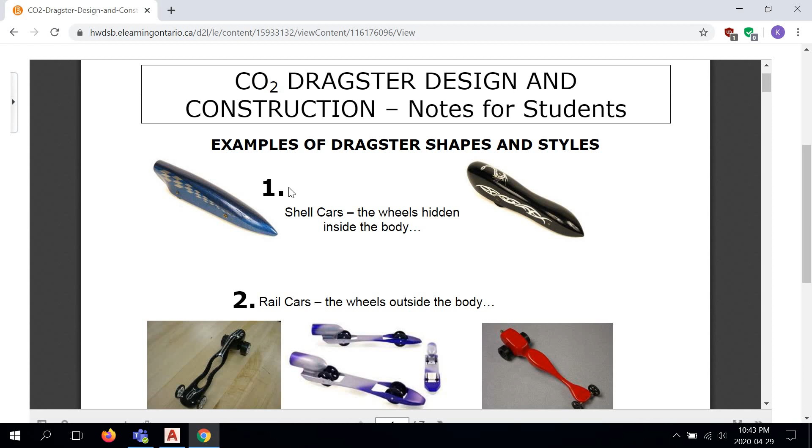Versus rail cars, which you see here, where the wheels are totally on the outside of the car with just an axle hole drilled through the body, which is how my blank looks at this time.

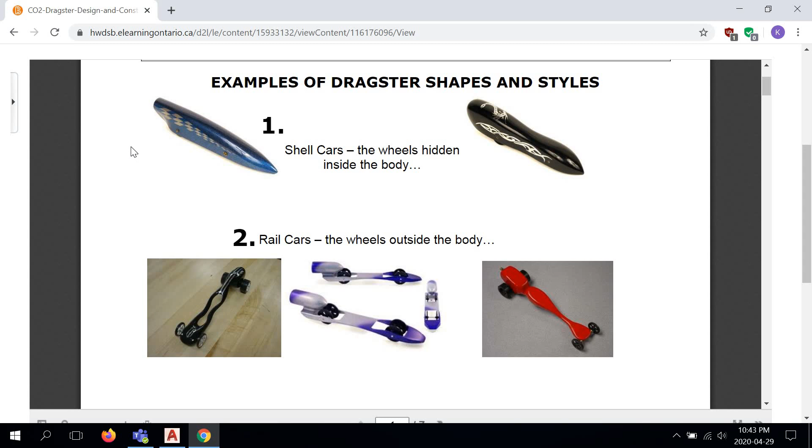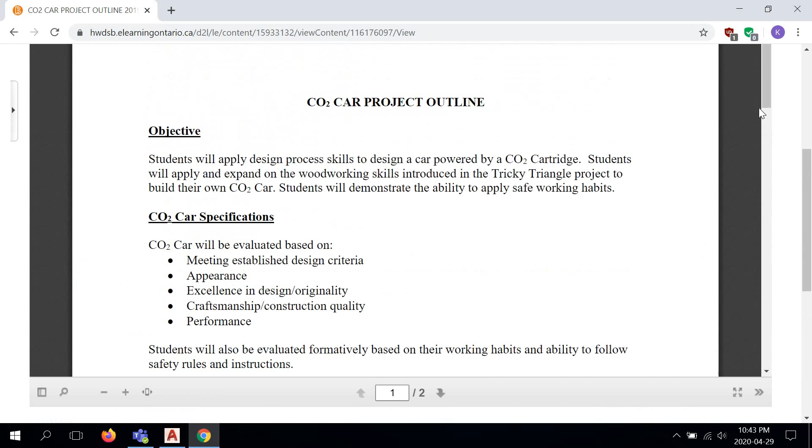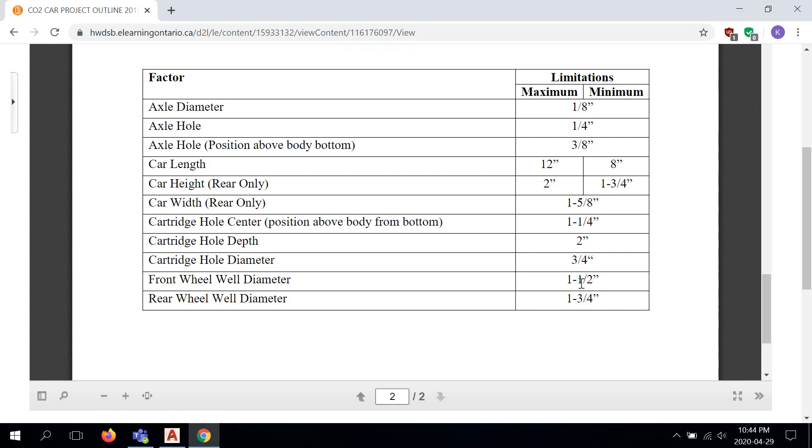Let's take a look at the project outline sheet again. If we're going to be drilling larger holes to shell a car out, we're using 1 3/4 for the rear and 1 1/2 for the front. This is hard to see in this drawing, so we'll check the chart: rear wheel well diameter is 1 3/4 inches, and front wheel well diameter is 1 1/2 inches. These are the two sizes we'll use for our side view in terms of circle diameter.

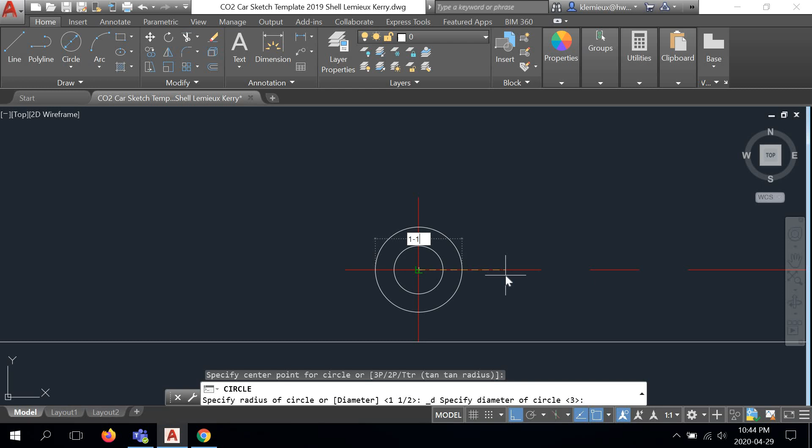So if we go back to our drawing, we're going to use center diameter circle, snap to the center of the axle hole, and draw this circle at 1 3/4. Enter. The front one is 1 1/2 inches, so right click, left click, repeat circle, find the center, and type 1 1/2. Whoa, something went wrong there. Let's try that again. Center diameter. There, okay, now we're cooking with gas.

So these wheel wells need to be moved to the hidden layer. Why do we do that? Because it's a shell car. When we look at the car from the side view, we won't see the wheels inside the car. We're not actually drawing the wheels here, only the hollowed out space where the wheels will sit in the racer. We're not drawing any hardware—no wheels, axle bushings, axles, CO2 cartridges, washers, or screw eyes. We're just drawing what we're shaping out of wood for this project, what you're manufacturing from scratch, not what you're purchasing.

So we're going to trim the bottoms. Select trim, select the bottom of the car as the boundary, right click, then left click, and trim the bottoms of these wheel wells away. They have to be trimmed because, again, they're not actually part of the wheel system—it's just a hollowed out space.

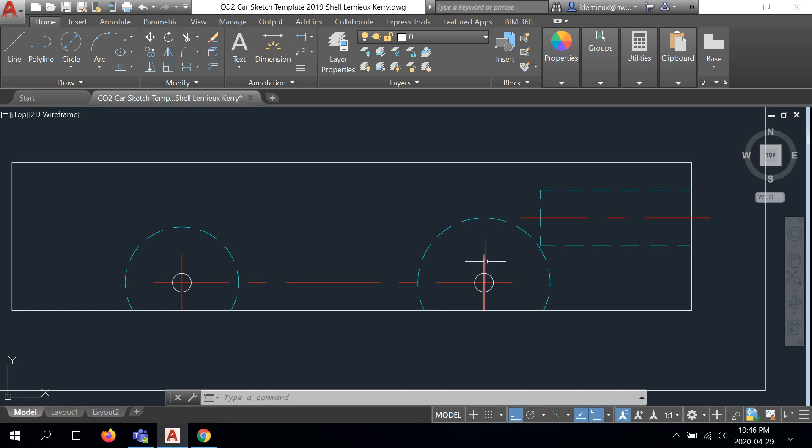Okay, so our center lines now have to be adjusted to suit these new circles. We're going to have to grab your center line and extend them to the quadrant, and then pull out with a grip 1/4 inch per side.

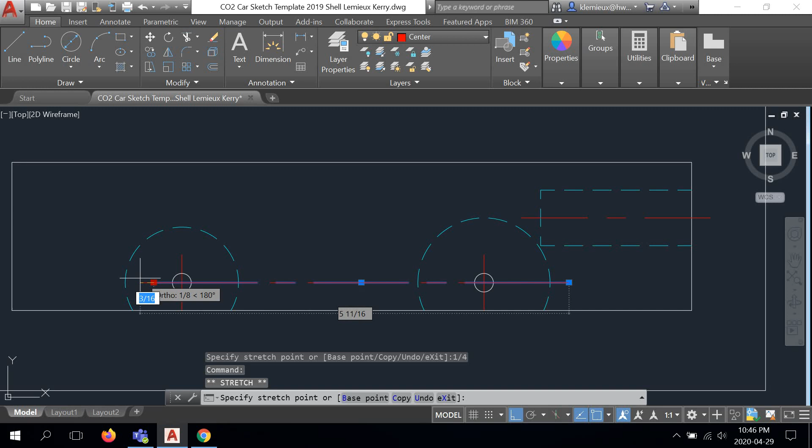Do the same thing for the top here. And the same thing here. Last one. Okay.

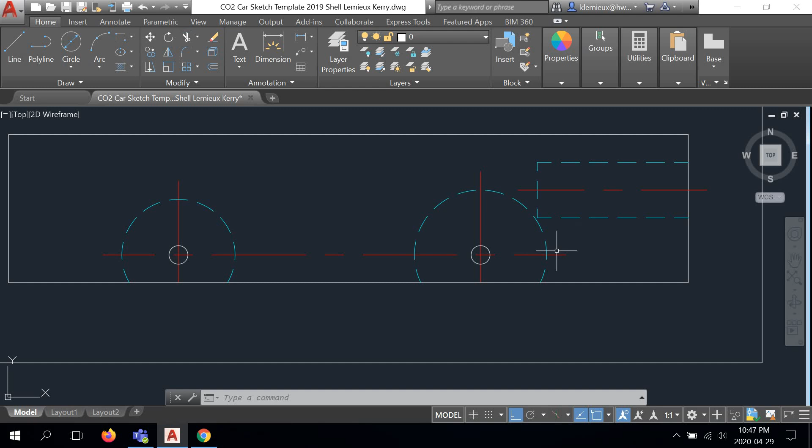Now you need the quadrant snap to do this, so make sure it's turned on. If you're not able to pick it up, you can go into the object snap settings by right clicking here, left clicking snap settings, and making sure that quadrant is checked on. In my case it was checked on, yours probably won't be, so go in and check this on, and then you'll be able to do what I just did. Alright, so we'll hit OK. Alright, so our side view is looking complete now for a shell car.

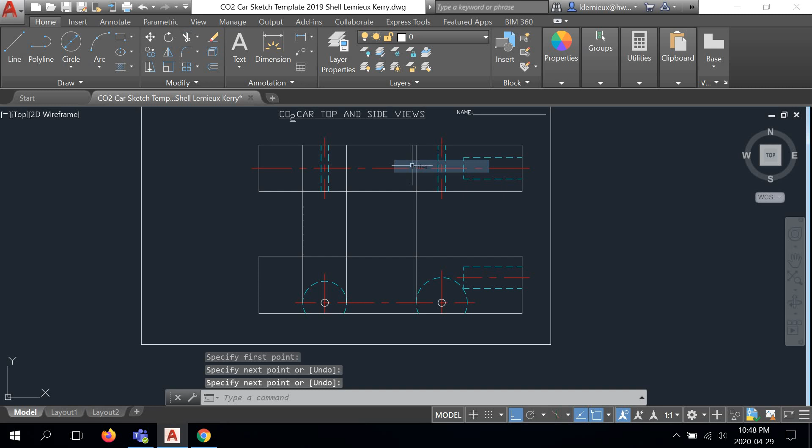So now we're going to take a look at the top view. What we're going to do is grab a line, find that quadrant, and pull a line up to perpendicular, like this. And then right click, left click, repeat line, do the same thing again. Right click, left click, left click, right click, left click, enter, escapes the command, and so on.

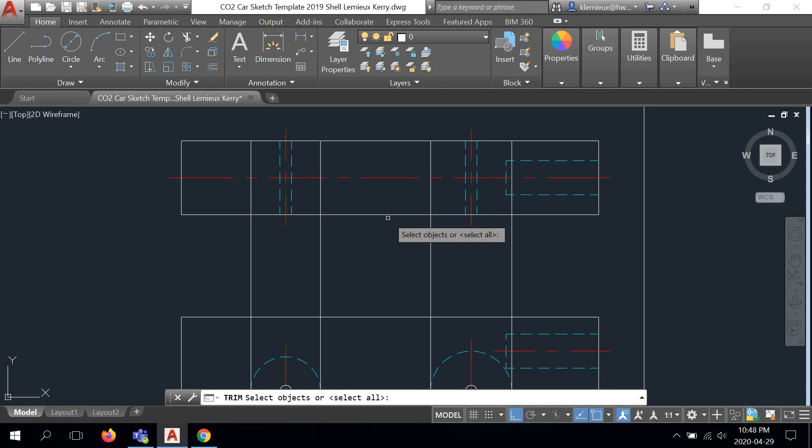Alright, so now we know where the wheel wells begin and end for the front and the rear, so we're going to trim what we don't need. Let's hit the trim command, pick this line as your boundary, and then trim away these lines here. Okay.

Again, because we're looking at this from the top view, we don't notice the wheel wells from the top, so these lines have to be turned to the dark side, hidden lines. Okay.

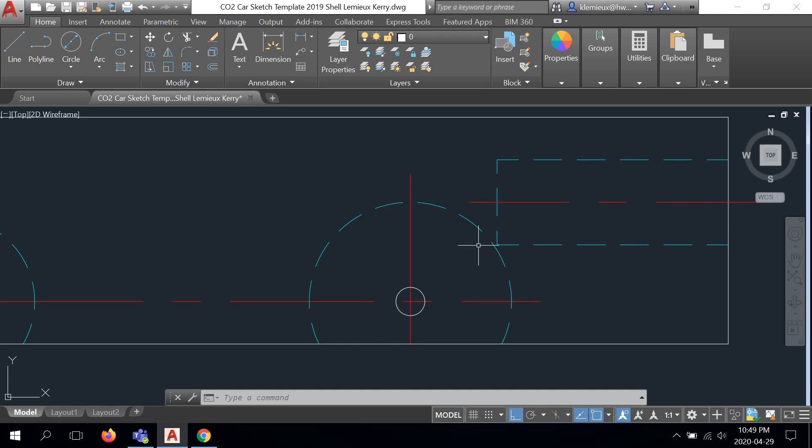Now, some students look at this and they think, oh, that's not very good. Look, my rear shell wheel, this CO2 cartridge hole drills into the end of it, and it's not going to work. So this, I need to change this. I can't do a shell car. Well, yes, you can, because if you look at this from the side view, it's just the way it presents. You can see here that the cartridge hole doesn't meet the rear wheel. There is just enough space here, if everything is laid out and drilled in the correct position, that the rear shell wheel will not meet up with the CO2 cartridge hole.

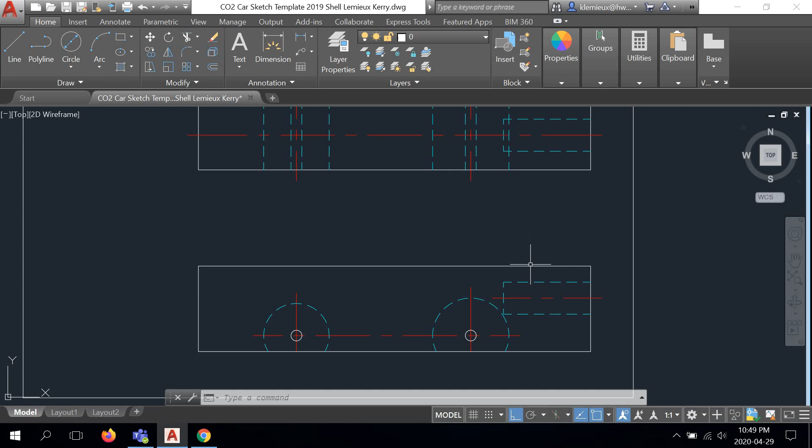So you're good. It just looks that way from the top view because, from here down, from the top view, this cartridge hole is covering that. It kind of looks like it's interfering, but it really doesn't. So, just in case you were wondering, everything's good.

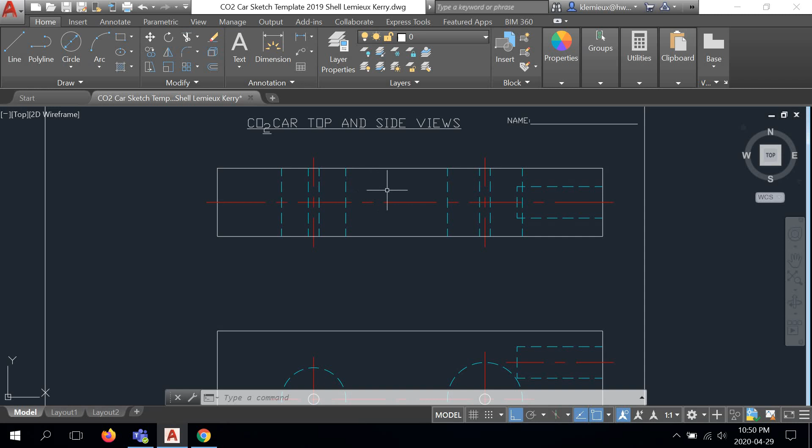Alright, so now we need to decide how far we're going to be drilling in from the inside out. In the manufacturing process, we're going to be cutting the blank in half, and we're going to be drilling each side from the inside out and then gluing it back together.

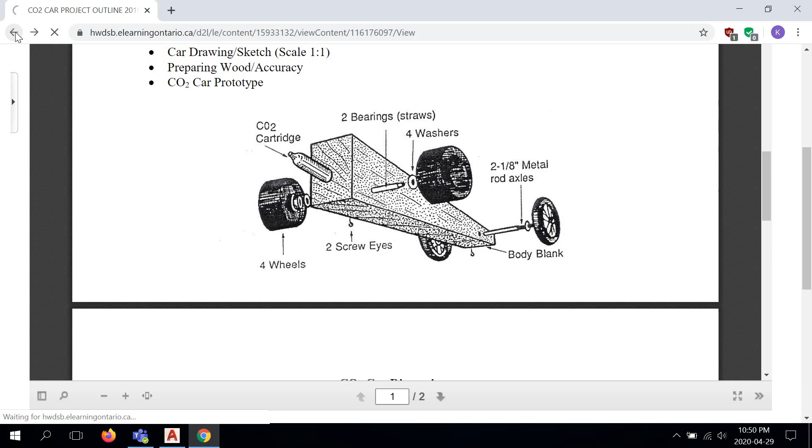So let's take a look at another sheet here. Let's look at CO2 car design process in AutoCAD and pencil drawing consideration. So these are things to consider while you're designing your types of cars. Okay, so CO2 car design process.

Shell wheels, which is what we're talking about right now. It says wall thickness on each edge for the rear wheels only should be no more than 1/8, preferred, or as thin as 1/16. So when you're designing a shell car, your rear wheels should be at the most 1/8, at the very least 1/16, or somewhere in between. So I'm basically giving you the information you need to know to get your shell wheels to work properly on your rear of your car.

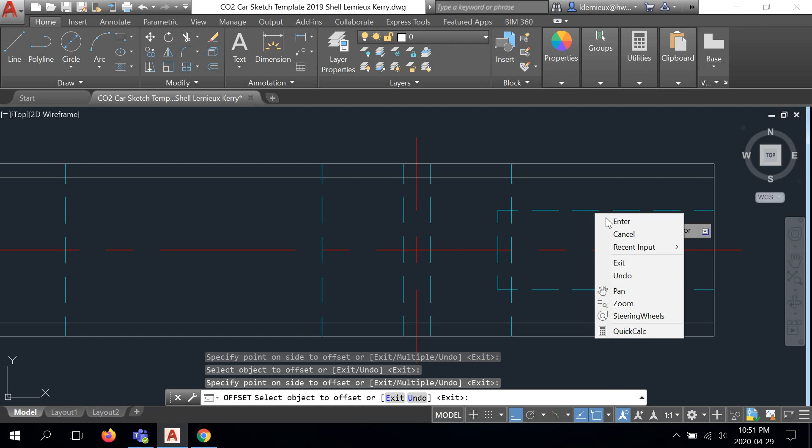So we are going to offset 1/8, enter, and offset from here down and from here up. Okay, so that is what 1/8 looks like. What we do to one side, we have to do to the other because there's a center line representing symmetry.

So let's trim the extra lines. So this one, this one, this one, and this one. And then this line and this line are turned to a hidden line.

Okay. Now, the axle hole passes through the middle, but we're drilling this from the inside out, so we would have drilled our axle hole first before cutting it in half. So that means after we cut it in half, we've drilled these 1 3/4 inch holes in diameter from the inside out each side.

We're plowing away and removing the axle hole in the middle here, so this has to be trimmed out. So we're going to use this line and this line as boundaries, and we're going to trim away the axle hole there.

So the only axle hole that remains is where it's solid, where the wall thickness is here, here, and here. So this line and this line, this one and this one can't exist in a shell wheel style, right? Because this hidden line here makes no sense beyond this line, since it's solid material in these corners. So they have to be trimmed. This and this are your boundaries, and then trim these corners. And now that looks correct.

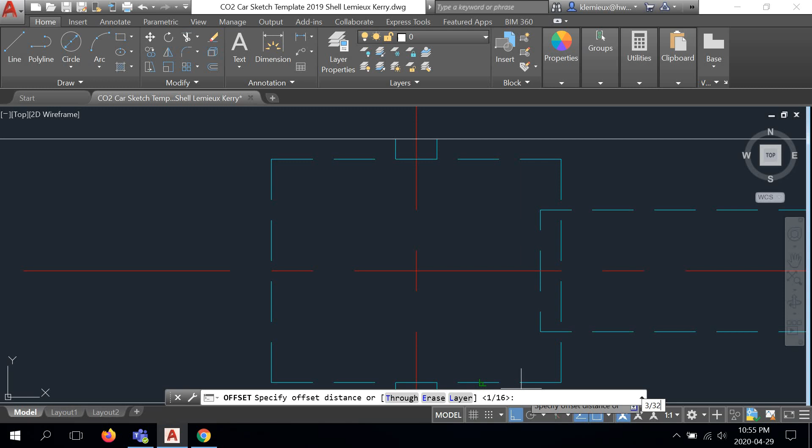So how about this? Why don't we erase that line, and why don't we look at 3/32s, which is between 1/16 and 1/8. There. So let's do this to both sides.

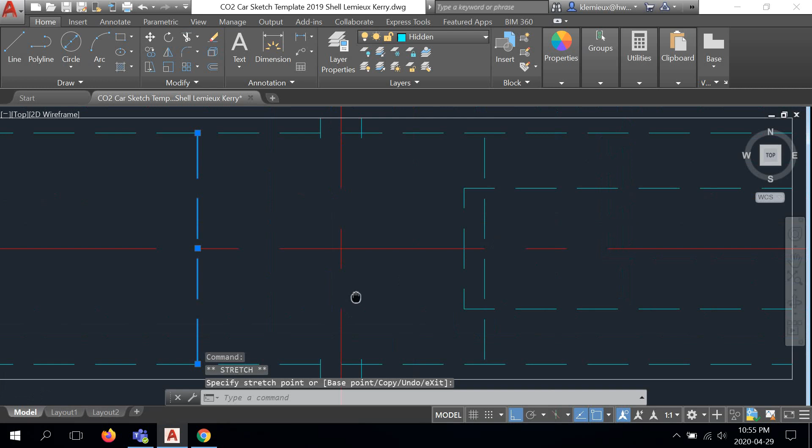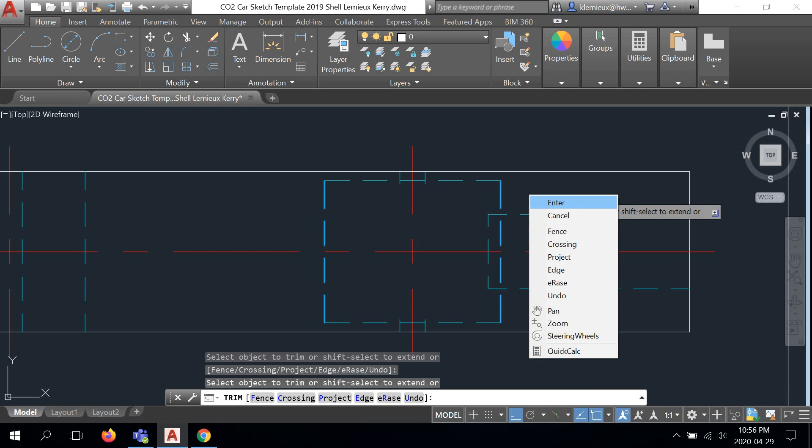Let's make that hidden, and we'll just make a little adjustment here. So we'll bring this... whoops. Okay? And then we're going to trim. And then we have just a little bit more trimming to do. We got to trim the axle hole touch.

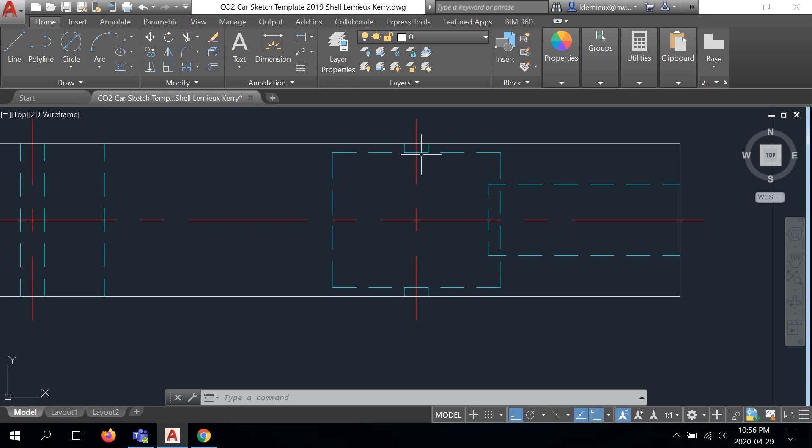Okay, and that gives you a little more room in the wells, and it's still enough to be pretty strong here. It's better than a 16th, but not quite an 8th. So I didn't have to do that again, make it shallower, but I wanted to show you how to edit it if you wanted to change it, right? So it's up to you, but I'm pretty happy with this, and I'm going to leave it the way it is for now. I probably won't be changing it again.

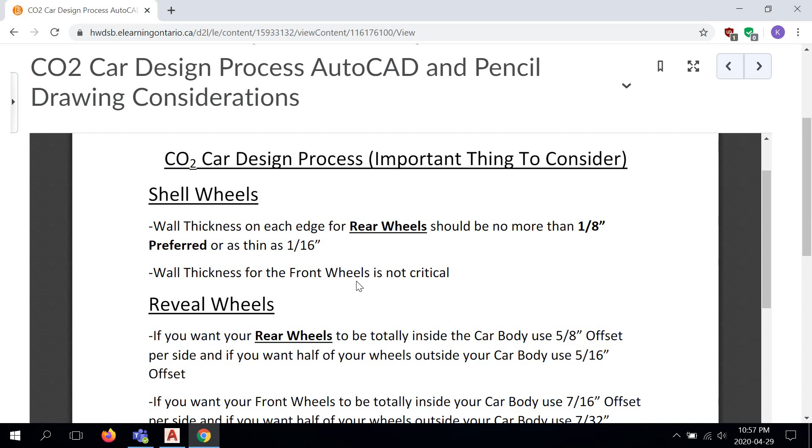So now we have to look at the front wheel. And again, the front wheel is not very critical. It says wall thickness for the front wheels is not critical because I listed here that your front GTLX CO2 car wheel width, this is a shell wheel, which is 3/8 wide. It's pretty narrow. You got plenty of room in your racer to place those wheels.

Now this is for the rear. The rear shell wheels are 9/16, so they're fatter and they have more of an opportunity to rub together if you don't drill the hole out enough. But this is pretty relaxed here. So I would say I would go no less than 3/8.

And if we measure this, we get 7/16. So basically you've got a 32nd on each side, right? So look how much material you have here in terms of wall thickness to get away with versus here. So you could actually shorten this up. You could make it the same as your rear wheel if you wanted, or you can leave more material here on your wall. It's really up to you.

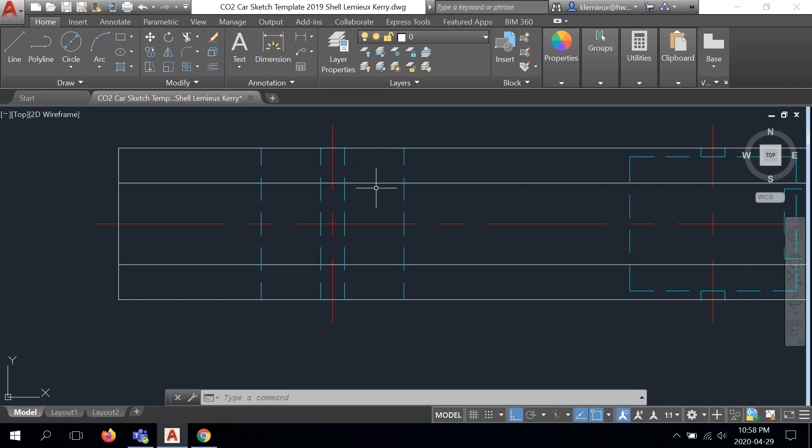But this is where I would leave it at least. I mean, you wouldn't be drilling any more than this—well, I shouldn't say that. It wouldn't be drilling any less than this, because then you would end up possibly crowding the wheels and they wouldn't fit. So I'm actually going to erase these lines. I want to leave myself a little more room.

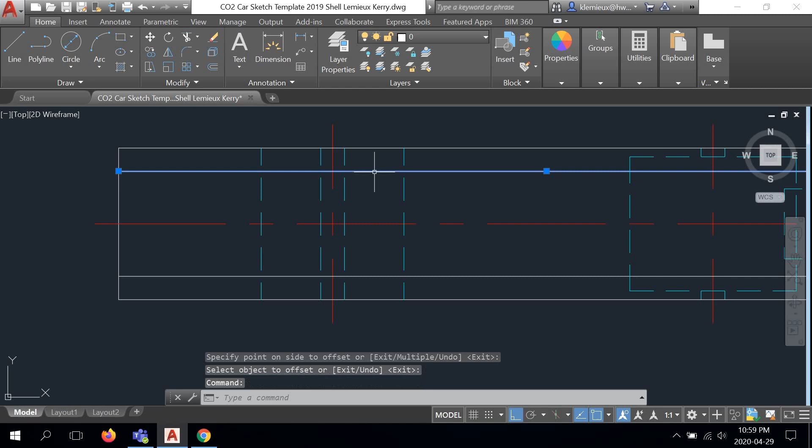I'm probably gonna select quarter inch wall. Like that. Just to be different from the back. That's plenty of room for my wheels to sit. You can pick any size you want, right? Because you're the designer, right? These lessons are primarily just for process, to show you how things are done.

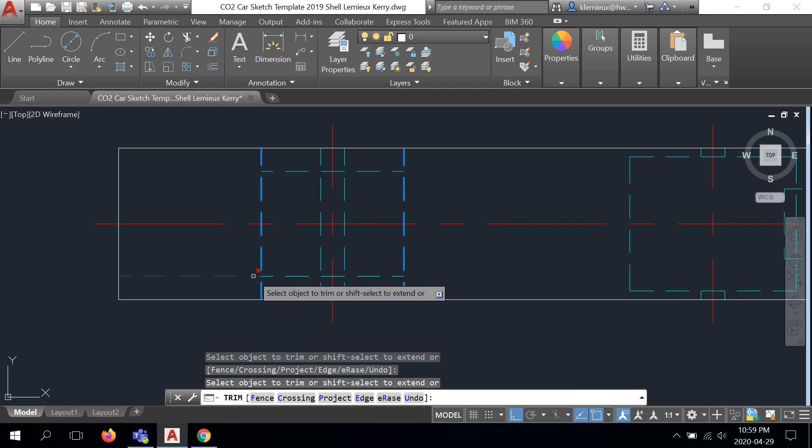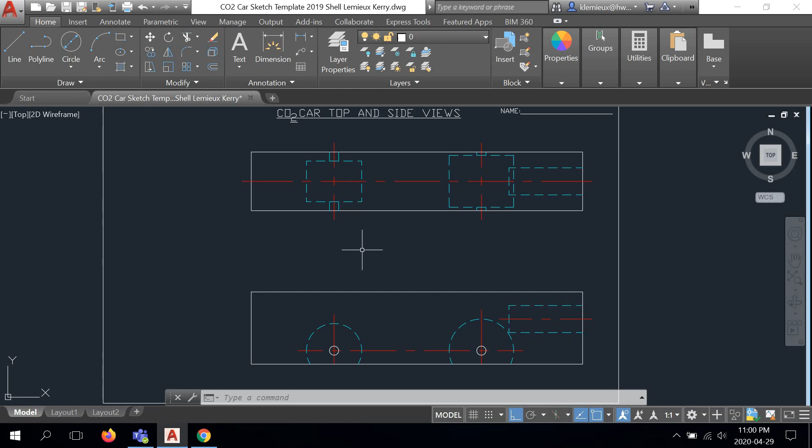So we're going to trim. We're going to do this the same way we did it with the rear. Trim all the axis lines. Boundary. We're going to trim out the middle axle hole, and we're going to trim out the wall in the corners. And that is perfect. So that works. That would work perfect for a shell car design.